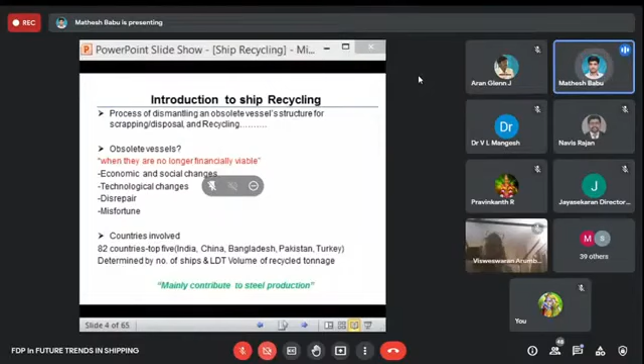So the other reason is disrepair. After certain service of the vessel, if you see the condition of the hull due to corrosion and other factors, due to age, it results in much cost for maintenance. So instead of maintaining the vessel, the owner decides to scrap it due to the age factor, keeping in mind the cost of maintenance is going to be high.

So the other factor is misfortune, maybe due to accidental damages as a result of collision, running aground, or being dismasted in storms, which has led many vessels to be scrapped through salvage rather than undergoing repairs, which would cost very much.

So therefore, when a ship reaches its stage, it becomes necessary to discontinue its operation, and therefore we dismantle the vessel and recycle the material which was used during construction.

So here I would like to highlight that I will be using the word ship recycling throughout this presentation rather than breaking, dismantling or scrapping, because as our Bhupati sir has highlighted, by recycling the construction material and components, the demand for natural resources for producing the same materials is drastically reduced, with consequent reduction in pollution. This directly results in reducing CO2 emissions, which in turn contributes towards the Paris Convention, where we can meet the challenges in the area of climate change.

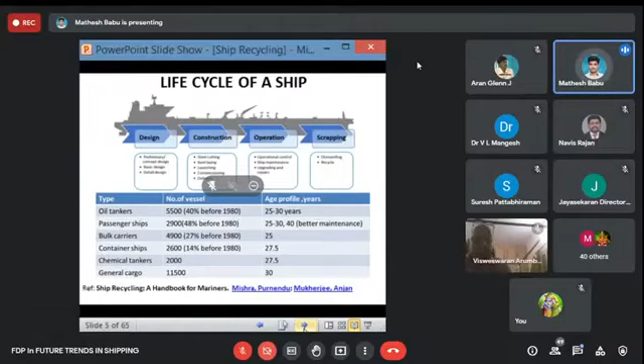So who are the stakeholders in the area of ship recycling? One is we start from ship owner, and then demolition broker, cash buyer, local agents, and scrapyard operators.

A ship owner is one who decides to end the economic life of a vessel when the maintenance cost of the vessel starts to exceed possible revenue, or when the vessel seems not suitable for the second-hand market, it's likely to be sold on for scrapping.

So this ship owner will decide, and then he will be contacting any demolition broker, and the demolition broker will look for cash buyers, maybe directly from a ship recycling yard itself, or some brokers available in the market, and he will be taking it to any ship recycling yard operator's attention, and then it will be sold there for scrapping.

So we all know the reason for the rise, ups and downs of ships sold depends mainly on market conditions, which is decided based on factors like the cost of used steel and the presence of metals available in the market. Not only that, the availability of ships for resale matters - if the freight movement around the globe is very good, then the ships available for dismantling will be less, and the cost will be more. Likewise, certain factors decide the cost of the vessel which will be taken for tender or bid for scrapping.

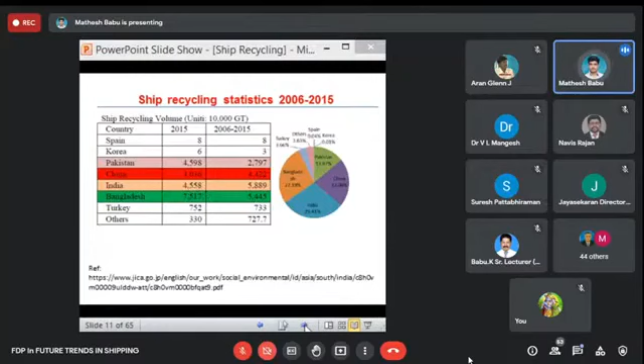So what are the statistics as of now? According to data released by the NGO Shipbreaking Platform, 630 ocean-going commercial ships and offshore units were sold in 2020, out of which 446 large tankers, bulkers, floating platforms, cargo and passenger ships were broken on the 3 beaches in South Asia, amounting to around 90% of GT dismantled globally.

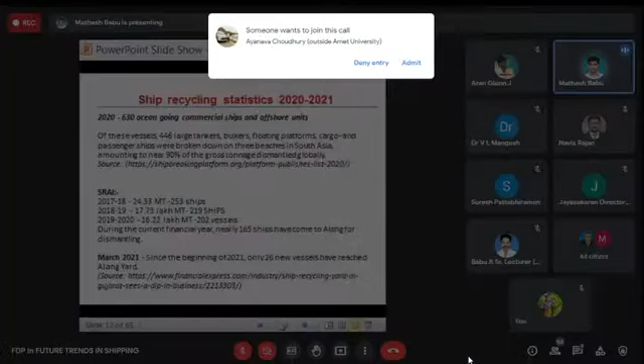As per the official data of GMB, during 2017-18, 253 ships were dismantled, and in 2018-19, around 219 ships, accounting for around 17.73 lakh metric tons. In 2019-20, 202 vessels were dismantled. Of course there is an impact due to the current COVID-19 situation - since the beginning of 2021, only 26 vessels have reached Alang Yard. But vessels purchased by various owners are available here and there, said to have reached this Alang ship recycling facility.

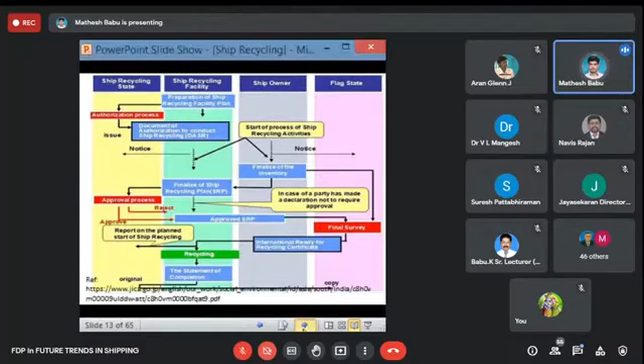So we have seen the role of the ship recycling state, ship recycling facility owners, and ship owners' responsibility in order to ensure environmentally friendly ship recycling, as covered in the previous slides. Now we'll see the ship dismantling process.

This process takes place in the Alang-Sosiya ship recycling yard, where most of the plots - around 150 - are actively involved in carrying out this ship dismantling process. The various facilities required include temporary storage of oil sludge, PCB-containing waste, storage tanks for bilge and ballast waters, space for welding and cutting operations, temporary storage of scrap, asbestos handling facility, radioactive material handling chambers, protective wear keeping rooms, areas for loading and unloading using trucks to be transported through roadways, walk-through areas, and areas for administration.

It's recommended as part of safety measures to maintain open spaces between 10 to 15 plots to provide space for safety and security by means of emergency access, parking, waterline installations for emergency services, access to the beach, etc. This results in around 60,000 to 70,000 direct jobs, and directly and indirectly results in around 3 lakh jobs globally.

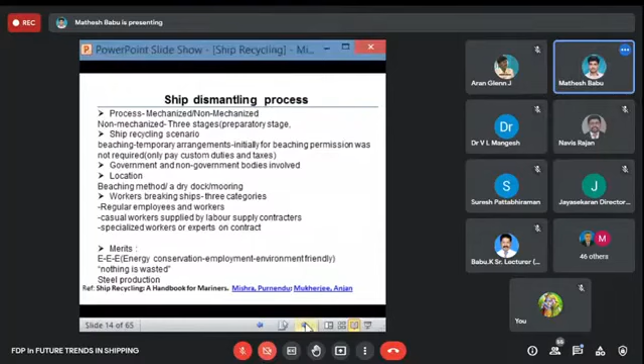Let us see the sequence of ship dismantling. First, we carry out a vessel survey to plan the work based on potential locations of hazardous materials. Second, we remove fuels, oils, other liquids and combustible materials, based on which hot work permits are checked for dismantling the ship to ensure worker safety. Then we remove equipment such as anchors, chains, and small equipment initially.

Then large reusable components such as engine parts are removed once accessible. These reusable materials and equipment are sold directly through the second-hand market available outside the Alang market. Once the propeller and other major equipment are removed, the remaining portion is pulled into shallow water.

Followed by that, we take the process of removing and disposing asbestos clearly as per the guidelines given by regulation. We have to follow the guidelines and dispose it properly. We'll not get into that since it's a controversial area here.

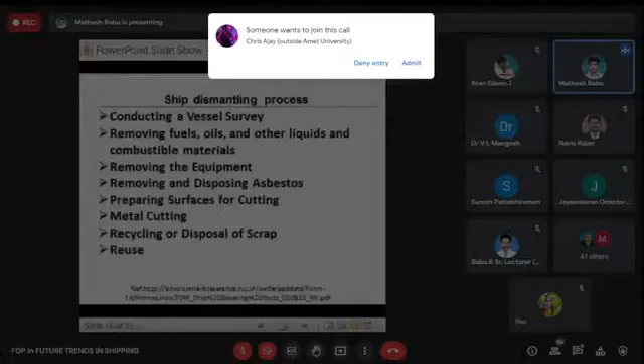Then we go for surface preparation for cutting. First, paint is removed after asbestos and PCBs are removed, followed by removing potentially toxic materials. A specific cutting preparation should be given, such as grit blasting. Then we go for metal cutting.

First the upper decks, superstructures and systems are removed, followed by the main deck and lower decks. Mostly the technique used for metal cutting is oxy-fuel cutting torches. Sometimes shear saws are used, based on whether it is non-ferrous metal only. During my visit to Holland for my postgraduate program, I saw they use an oxy-LPG mixture for cutting operations there.

Then we go for recycling or disposal of scrap through the second-hand market, and then reuse of materials. Many parts can be directly used, like electronics and furniture, electronic equipments. Everything can be directly purchased in the second-hand market and used for domestic purposes there.

One thing to keep in mind as per regulations is that due to security issues, items can be misused by anti-socialists. Likewise, communication equipments like walkie-talkies should be handed over to the government authorities prior to beaching. So that's the process involved in ship dismantling.

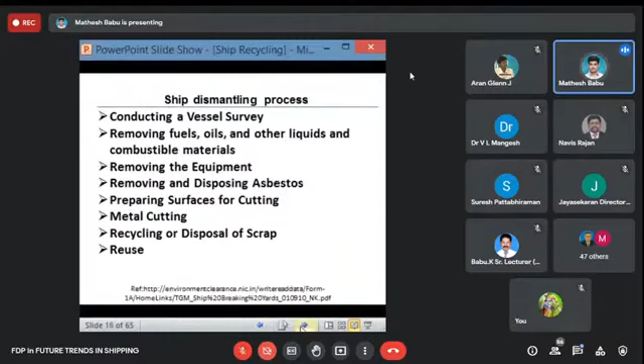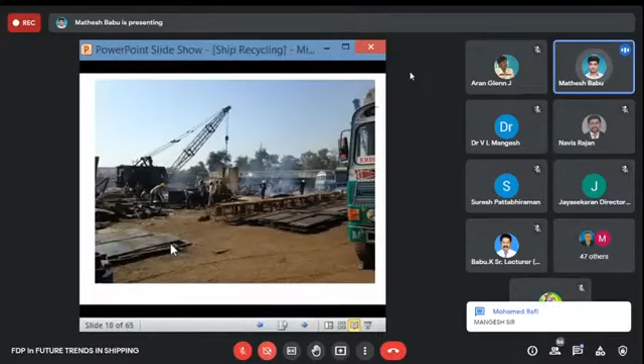I'd like to show a few pics which I took during my project there. This is the entry into Ship Recycling, Alang-Sosiya Ship Recycling Yard, where the dismantling process is taken care of. You can see the plates cut in proper dimensions as required, which will be taken for civil construction purposes.

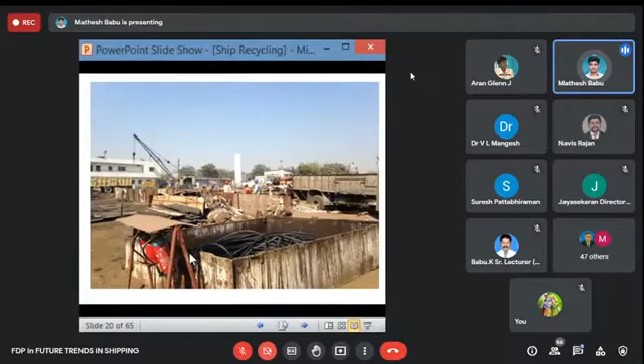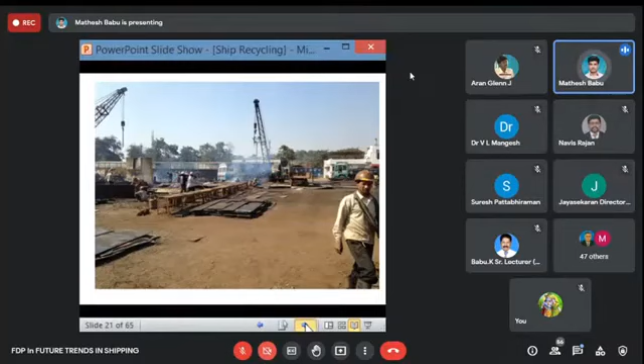One example, you can see a vessel which is beached prior to dismantling, with safety equipments, oxygen plant, and fire extinguisher arrangements. Most of the equipments were old ones, operated by high-speed diesels for example, so the energy consumption is much less compared to other yards in other countries where they use more energy-consuming technologies. You can see one of the oldest equipment still functioning, and cranes loading and offloading to the trucks.

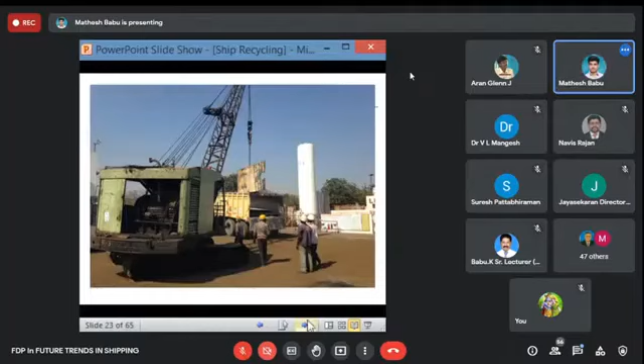These are taken to the reusable sites and second-hand market, where furnitures, electronic equipments, tools, auxiliaries, lamps, auxiliary diesel motors, pumps, winches, cranes, radar and electronic equipments are directly reused. A few life-saving and fire-saving appliances, after renovation and presenting to the class, can be again certified and used on board.

Most of the equipments are sold in the second-hand market, and at the exit from the yard you can see a truck carrying oxy cylinders used there. Now, as we all know, the oxygen available for the industry has been stopped and taken for domestic purposes, to be used in hospitals for this situation.

So, as initially introduced, 90 to 95% of materials are reused, which can be categorized into scrap materials, solid waste, and liquid waste, which will be disposed through treatment plants. Solid waste goes through a centralized disposal facility run by Ship Recycling Association India and GMB, and scrap materials are disposed for reuse through the scrap market.

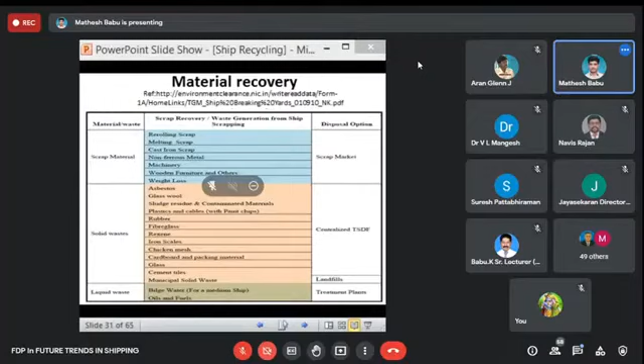Around 70% of materials from the vessel is re-rollable plate. You can see an idea for a general cargo vessel: the weight loss due to its service condition may be around 9 to 15 percent, 56 to 70 percent will be re-rollable plate, 10% melting scrap, 2 to 5% cast iron, 1% non-ferrous metals, 4 to 8% machinery, and 5% furnitures like wood and other furniture equipments.

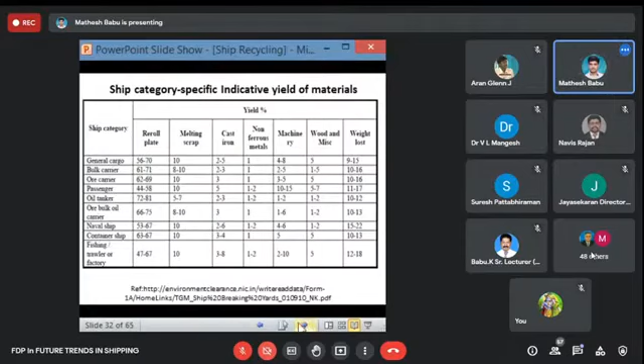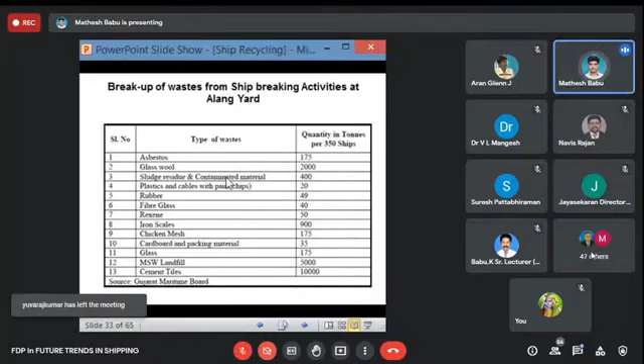Waste which is to be disposed as per guidelines includes asbestos, glass, sludge, plastics and cables, rubber, fiberglass, Rexene, iron scales, etc., which will be taken care of under regulations by GMB to dispose properly.

The Technical Environmental Impact Assessment Guidance Manual for shipbreaking yards has been prepared by the Ministry of Environment and Forest, and is available as an online resource, giving certain guidelines for shipbreaking yards to be followed. One main task is identifying hazardous material, which the convention has now addressed, requiring an inventory of hazardous material list available on board. During the duration of recycling, this will be handed over to the ship recycling yard operator.

It is made easy now, but that technical guidance can still be followed. You can see Annexure 1, which gives the elements of the ship breaking process; Annexure 2, list of hazardous materials and substances applicable to ship breaking; Annexure 3, main items of ships and substances of concern with disposal options; and Annexure 4, preventive measures for environmental elements of concern.

Like we have the responsibility of learning the conventions, just MARPOL, SOLAS, different annexures, we'll have to have an idea on various annexes from technical guidance for shipbreaking yards also. So just for information purpose, it has around 16 annexes, categorized into different zones where much care should be taken at that area.

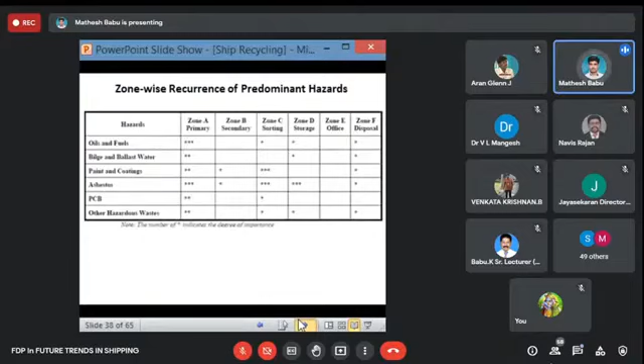Just an additional information, so we'll come to the proposal for enactment of registration for recycling of ships. Based on EU ship recycling regulations, shortly called EU SRR, and then the Hong Kong Convention, IMO, which has led to development of guidelines by IMO. Likewise, we'll have to have an idea on that, and based on which we have to take care of this EU SRR, because some 4-5 years back, European Union countries refused to send their vessels for recycling in our area, complaining that we are not taking care of the environment likewise.

So for that purpose, the EU ship recycling regulations came into picture, which was set up to ensure that proper vessel dismantling methods are used to ensure safe disposal or recycling of all the components, including hazardous material. It entered into force in December 2013 and concerned all EU flagged ships as well as ships from third countries calling at a European port or anchorage of 500 GT or above.

So the rules relating to hazardous material on ships have been framed. First, the EU SRR prohibits or restricts the installation and use of hazardous materials such as asbestos or ozone depleting substances on board ships. Second, it makes it mandatory for ships to have on board a certified inventory of hazardous material specifying the location and approximate quantities of those materials.

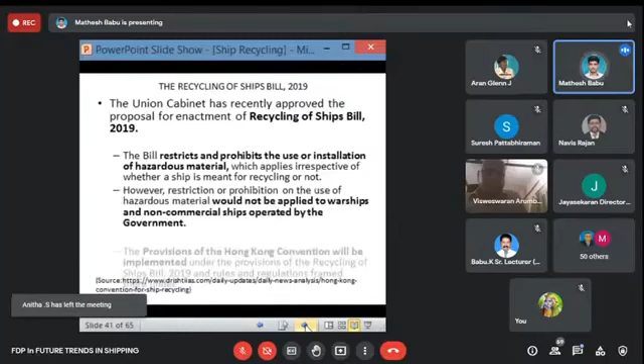So in order to keep the market successful, we are now leading to tackle the hurdles. Our government has passed the Recycling of Ships Bill 2019, which approved the proposal for enactment of the Recycling of Ships Bill, following the EU SRR convention and ratifying the Hong Kong Convention there. So the bill restricts and prohibits the use or installation of hazardous material, which applies irrespective of whether the ship is meant for recycling or not.

However, this restriction or prohibition on the use of hazardous material would not be applicable to warships and non-commercial ships operated by the government. The provisions of the Hong Kong Convention will be implemented under the provisions of the Recycling of Ships Bill 2019 and rules and regulations framed thereunder.

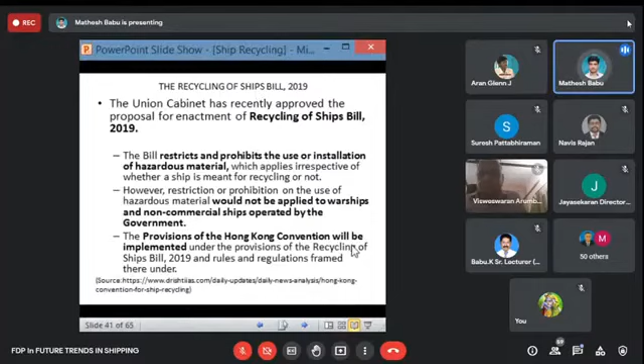And beaching of ships for dismantling at Alang Shipbreaking Yard is increasing post-lockdown, and fiscal 2020-21 is expected to be the best for business at Alang, which will witness 40% of global ship recycling for the year.

We know Alang is blessed with natural opportunities with tides of 10 to 12 meters, so we should make use of it properly. This 40% now government is aiming to take it to around 50%. As studies have shown, the main contribution is by means of manpower.

This is achieved through migrant workers from UP, Bihar, Jharkhand and Odisha, which accounts for around 80% of workers directly employed in shipbreaking at Alang. Studies show most workers settle there permanently and live there, earning around 25 to 30 thousand. Only a few have left to their native places due to the current situation.

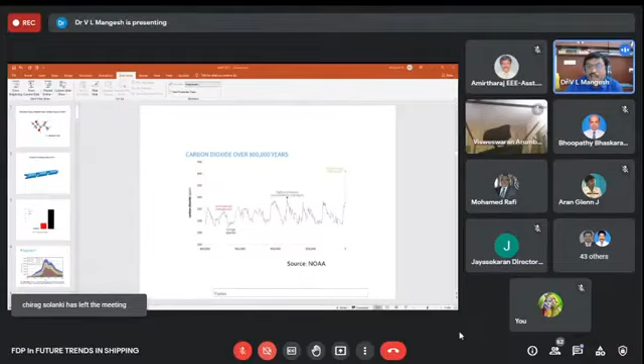So at the nano level, let us see what is affecting. Let's take this coronavirus. If I put a line here and take this line's thickness as 1 mm, and I put 1 million of these viruses into this line, this 1 mm will still be filled up with 1 million viruses. That is the size we are dealing with, and this little fellow is the size of 50 nanometers. So that's the size of our virus, which locked down the entire world for the last 1.5 to 2 years. This little fellow, just 50 nanometers in size, can do such colossal damage. The damage cannot be measured at all, what is happening at the nano level.

Now we will be extending to sub-nano levels. The study today will be at the sub-nano levels where...

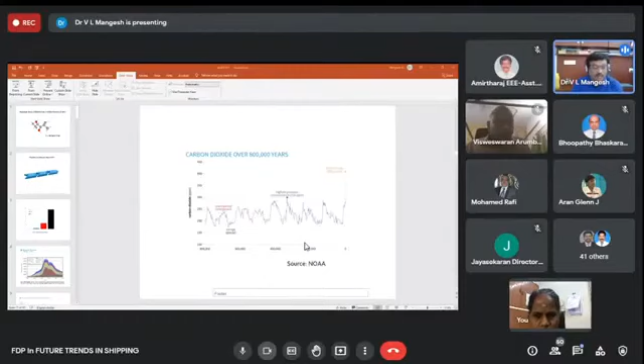Excuse me sir, Mangesh sir, please put it in presentation mode, it's not readable similarly. You have to put it in the slideshow. Okay ma'am, I can put it in the slideshow. Can I go with this now, ma'am? Yes sir, it's okay now, right sir?

So I was telling about these nano level particles, this coronavirus. I'll start again. When I draw a line, the thickness is just 1 mm, and in that thickness you can fill up 1 million viruses. That means a 50 nanometer size virus, 1 million of them can fit into this thickness of 1 mm. So in 1 mm, so much virus is there. This tiny little fellow locked us up for nearly 2 years and brought so much damage.

Today's study will be at the sub-nano level. I will be taking now - can everyone see this scribbling, ma'am?

Yes, sir. Yes, sir. Yes, sir.

So these sub-nano levels, what we are talking is 1 nanometer can have about 7 to 10 atoms. So imagine a 50 nanometer size virus can have about 350 atoms inside. That is the size we are talking about today. We will be going to sub nano levels.

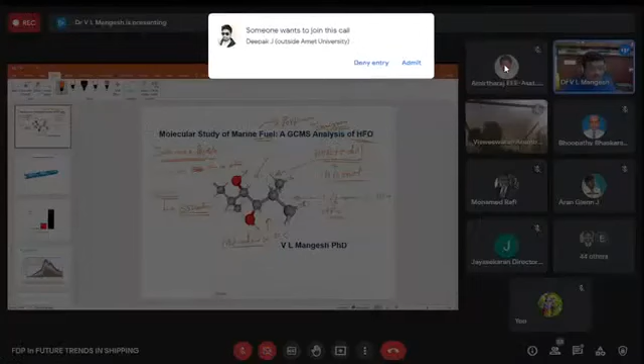It drives the entire ship. So what is most important is that we have to study at the molecular level, how this marine fuel can affect your performance and your emissions, right? Today that is the most hot topic going on. Your performance as well as emissions both depend on these molecules. So let's go and study about this - what are these molecules, what are the different structures there, and what we can do with it.

Now, the other one is normally marine engineering. Marine engineering deals with dismantling and assembling, correct? But today you will be dismantling and assembling molecules. I'll be demonstrating how we have done that so that we can modify this HFO fuel. Now, how to modify it and what are the components there? We will be stripping the atoms and assembling these atoms back in. That must be interesting, right? Instead of doing all your centrifugal pumps, pistons and connecting rods, today we'll be dismantling and assembling your molecular level fuel.

So now, what is the motivation to study a marine fuel at the molecular level? There should be some motivation to study that. Okay, well let's see the next slide. Here you have your NOx, SOx and CO2. The main motivation is because my IMO is pushing me to go for a reduction in emissions. So let me see at the molecular level what we can do for this, so that we can take care of some of the requirements of IMO.

So now we see that for NOx, it is already taken care by primary methods and secondary methods. Secondary methods, you have your SCR, which is taking care of your NOx to reach your tier 3 levels. When you go for your SOx, you have with scrubber and without scrubber. So these two things have been fairly well taken care of. A lot of studies have already been done by previous people. I'm not going to go into this that much, maybe a little bit I'll touch up and go.

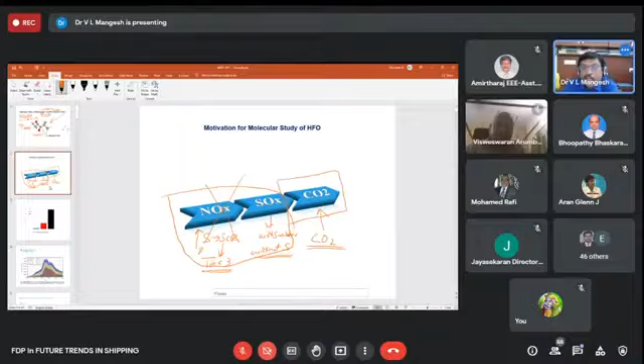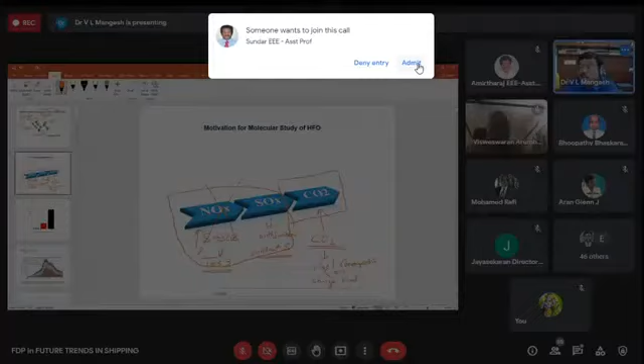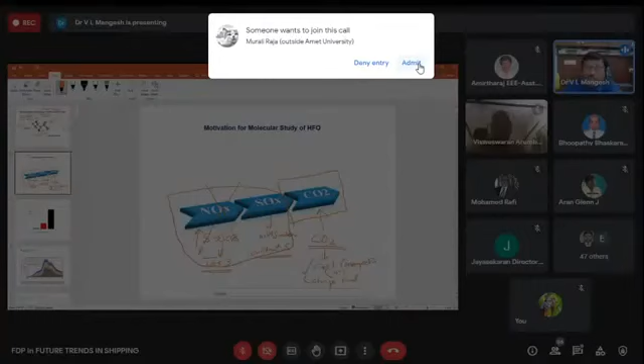My main area will be CO2. Now there is no technology here to reduce this fellow - CO2 has no technology to reduce. The only way we can reduce CO2 is to reduce our fuel consumption, or change the fuel. Now, how to change that? We'll study that step by step. This is the only option you have for CO2, or totally leave fossil fuel and go for some other method of driving the ships. So that is the only option we have here.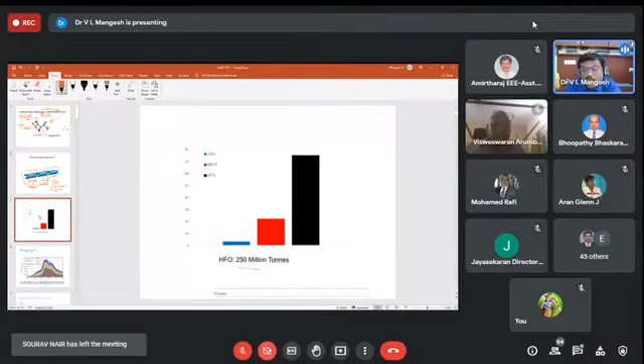Let's go to the consumption. As you know, about 250 million tons of HFO is being used every year by ships. So that is the most highly consumed fuel in shipping compared to your gas oil or your LNG. LNG has just reached about 5%, and LNG is still a long way to go to catch up with HFO.

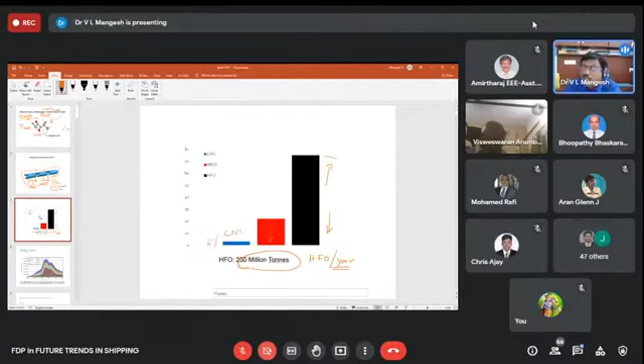The global SO2 emissions - I'll just touch up here. Some interesting points are there in SOx which many people have not highlighted. In shipping, this blue color tells you about only the contribution of shipping. So that's very less. But then we have a very proactive IMO - it sits on our back and keeps pushing us to be better. And of course, mariners can respond for that, and we'll try to improve ourselves.

So if you see this SOx, up to 2100 it is not going away. As per the report given here by a researcher, he says that SOx will be there - that means he is expecting HFO to continue for another 50 to 60 years. Okay, but of course we will have a lower sulfur fuel, but our contribution is going to be the same or lesser than that - much lesser than any other method of delivering sulfur to the atmosphere.

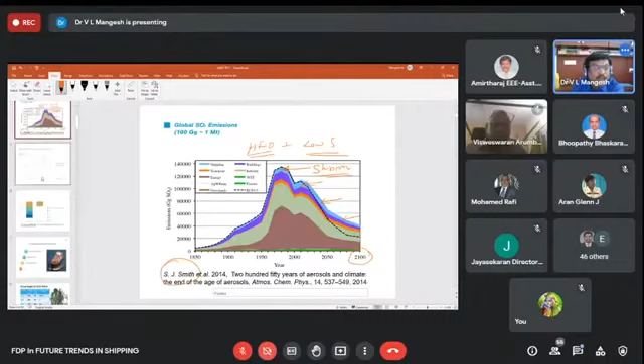Now we will see an interesting paradox here. This yellow line indicates without scrubbers, and this green line indicates with scrubbers. When you use scrubbers, you can use an HFO plus sulfur fuel because you're using scrubbers.

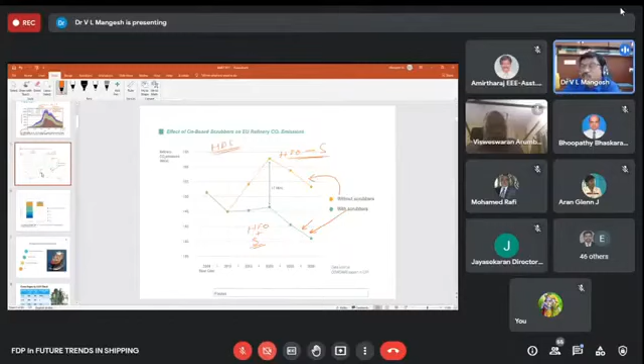Now what happens when you use a fuel of HFO minus sulfur, which doesn't have sulfur? This yellow line indicates that the refinery has to do a lot of work to remove it. We call that HDS, hydro desulfurization, to remove the sulfur from the fuel. They spend a lot of energy to do that, so they need 17 million tonnes per annum of CO2 that they release.

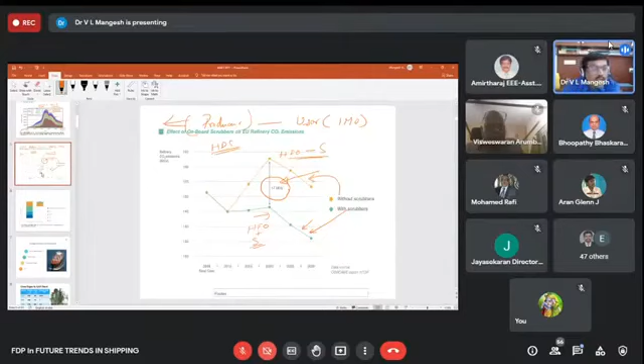IMO says don't release it, but the other fellow is going to release that anyway. There is no coordination between these two people, who are nothing but one is your producer and the other is your user, represented by IMO. The producer has his own associations. So this is an anomaly I like to point out here.

But look at SO2 and NOx. They are showing on the negative side, meaning they are cooling the atmosphere. So the net fact is the ships are releasing CO2, SO2, as well as NOx, and the net effect is that ships have been cooling the atmosphere.

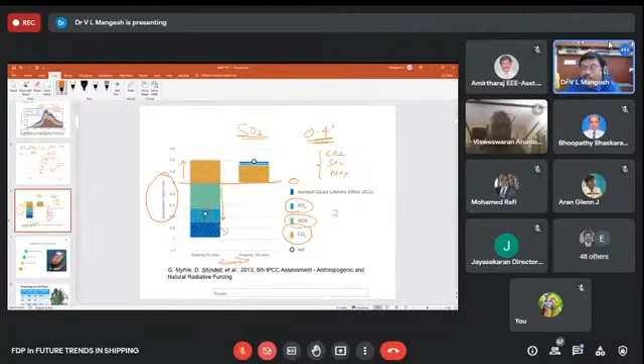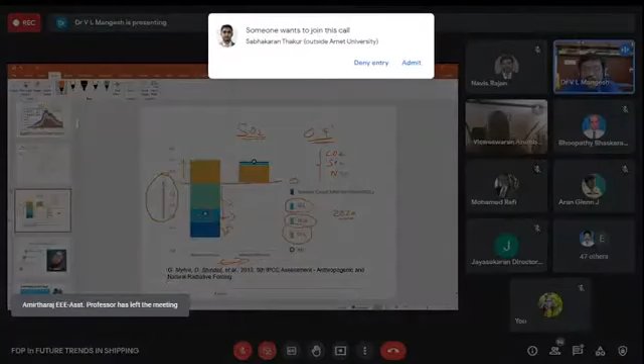Now there's a wrong notion going around that we are contributing to global warming. No, never - we were not contributing to global warming so far. But since 2020, we are going to add to global warming because we are removing these fellows with the Tier 3 regulations. We are going to be a net contributor to global warming because we are going to dump only CO2 into the atmosphere - our cooling agent SO2 is not there.

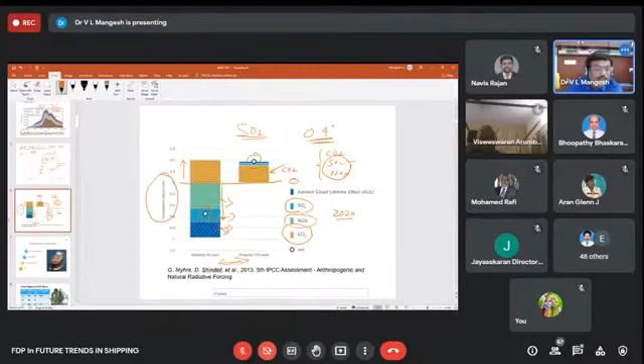Fine, sulfur has its own negatives otherwise, but when I am concentrating only on global warming, then SO2 was a positive factor. We have studied all that. Now let's go back to our CO2. This is where the headache is - CO2. For shipping, the headache is CO2.

How can we strategize to reduce fuel consumption? I told you only fuel consumption can really bring about a change in the carbon dioxide. That means I have to improve the energy efficiency, so my engine efficiency has to go up.

So they have brought up EEDI and EEXI and all these are coming up. They are going to add a burden on the designer as well as the operator - of course, we are the operators there. So definitely our load is going to go up.

The other option is to use alternate fuels. Let's see how much alternate fuels have been employed and what developments have occurred. But I would still say they are all slightly above the experimental stages. This is the line of experimental stages - they are somewhere here. Definitely there is a chance for these to pick up and go further.

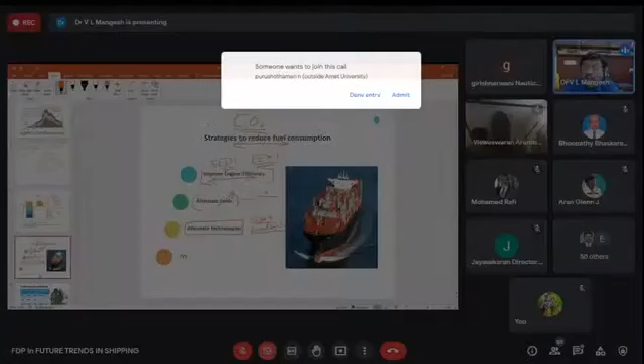Alternate technologies, like solar, wind sails and so on, are coming up, but they are still at the drawing board stage or small experimental level, and need to be adapted to a marine environment. The ship sails in different loading conditions and weather patterns, so these alternate technologies have to prove themselves compared to HFO. I always have a small bias toward HFO because as a sailor I have a love for it. Compared to HFO, the alternate technologies are going to take their time to establish themselves in the market.

Now I have made another option here, where we have done some experiments. I joined with IIT Madras and we did some experiments there to modify HFO - molecular dismantling and assembling of HFO. I'll discuss that a little later.

So the first point - improving the energy efficiency - let's see what has been done. We take one case study of MAN diesel. MAN is a pioneer in marine diesel. Initially it was MAN B&W, now it is purely MAN diesel. These guys keep on increasing the stroke length - the engine stroke length keeps going up. They have brought up something called a green engine, the G70, G80 and so on - they have the G series.

The S series has been serving the marine industry for many decades. Now they have come with the G70.

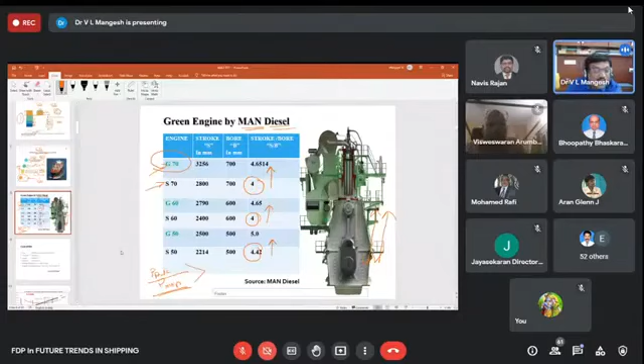If you see the stroke-to-bore ratio, from 4 it has gone up to 4.6514. The G60 model has gone up, and the G50 also has gone up. The higher the stroke, the better your combustion, because your P peak to the ratio of your P mean effective pressure will be higher. When it's higher, your combustion efficiency is much better. There are other benefits of a long stroke too, which we'll cover during question hour if the cadets are interested.

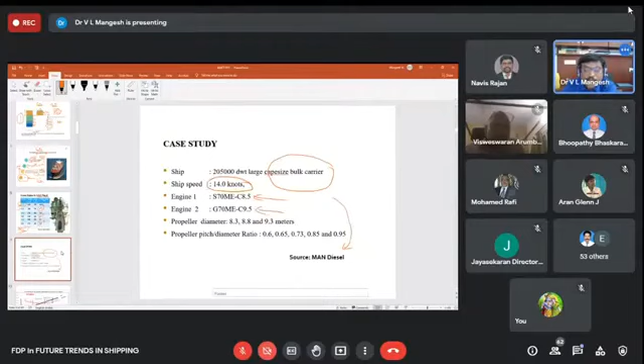Let's take a case study. We've selected a Cape-size bulk carrier study done by MAN Diesel, not by myself. They selected a ship speed of 14 knots and two engines, the G70 and S70, with different propeller diameters and pitch. The scenario is that an owner approaches MAN Diesel wanting 14 knots for his bulk carrier of 205,000 deadweight tonnage. Then what engine can we select? MAN is going to offer him two engines.

Now let us see how MAN will justify this when it comes to saving fuel.

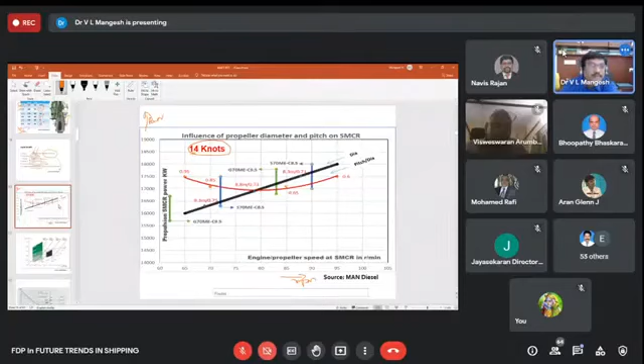Then you have two engines, this blue one and the green one. Let me select only the blue one. When I select this and connect it to this point, and bring it out here, you can see this represents the engine layout. This is your upper speed limit and lower speed limit, and the mean effective pressure at the upper end and at the lower end.

This rectangle represents where the engine manufacturer says your MCR can be anywhere within this point. Your propeller curve is going up, your MCR can be anywhere, and of course the MCR will be at this point here. Then we have the NCR, the normal continuous rating. At this point your MCR is here.

Now the designers have said that for an 8.3 diameter propeller, my NCR is here for the blue one. For this application, MAN says they can deliver 14 knots for the ship. That's what the owner wants, and that's what MAN is delivering. Let's see at what power it's delivering - it's delivering 17,500 kilowatts, offered by MAN at a speed of about 87 to 88 RPM. That's the first option, because the blue indicates the S70, the S70 engine, the S class, SMC class.

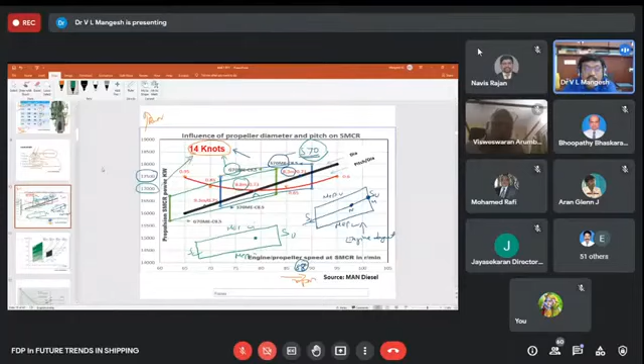Now look at this - this is the G70 engine and this is the S70 engine. Both are able to give 14 knots. But the point here is G70 gives you 17,000 kilowatts. With 17,000 kilowatts, they're able to give you 14 knots, whereas your SMC class gives you some 500 to 600 kilowatts higher to deliver the same 14 knots. So you can see the efficiency has gone up by 600 kilowatts, meaning you've saved that much power - over 17,500 that comes to about 3%. That's not a small deal, it's very tough to achieve. This 3% is not fuel savings, it's power savings.

And imagine, MAN must have suffered so much to get this 3% saving in your power. Okay, that's the level of research and commitment going on at MAN engines.

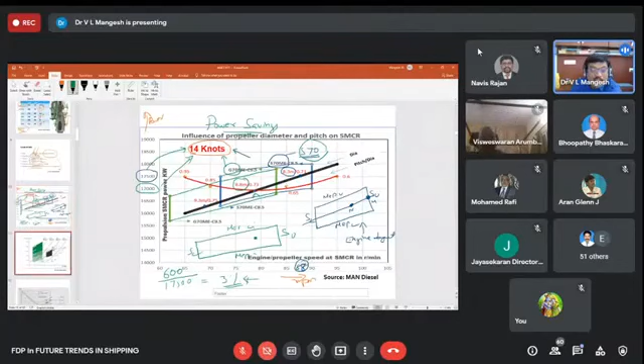Now let's see another option here. They have a suite of ships, I mean engines. There are so many types of G engines which are offered. All are operating at a very low speed, almost reaching the stalling speed. Look at that, like 58 RPM to 68 RPM. It is at a very low end, right? Compared to your SMC class, which is operating at about 72 to 80 RPMs. Much lower. I mean, I don't know, in future they'll go to 40 or 50 also. We don't know.

But this engines, at every knot level, when you select the engines, they'll deliver about 3% savings in power. You have to note it down - again, I mentioned it is power savings.

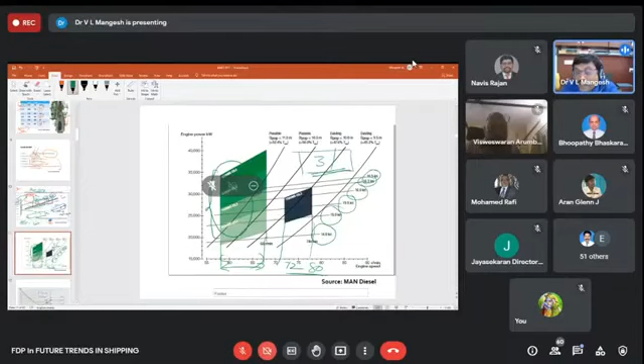The next slide - this is your SFOC. You must be knowing, all marine cadets, what is SFOC - specific fuel oil consumption, which is given in grams per kilowatt hour. If you see that, the fuel savings is about approximately 2%. So MAN has worked so hard to get a 3% saving in power plus a 2% saving in fuel.

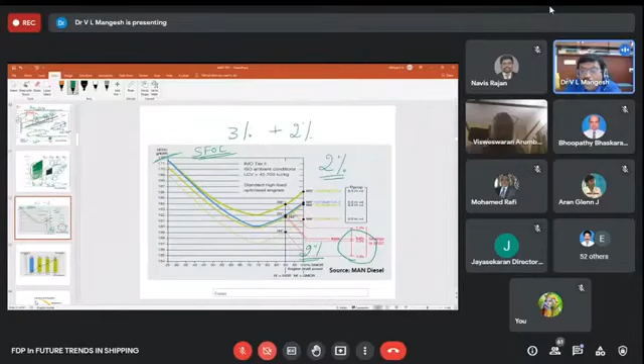These are different engines which are operating at the SMCR level. You can see that at the SMCR level, you get a 2% saving. To get that 2% saving, MAN works so hard.

Now let's see the other one - this is the net saving, fuel consumption saving. That means my power is around 3 and my fuel is around 2. And they are able to optimize and get up to 7.8% savings for a 6G70, a 6-cylinder G70, as compared to a 6-cylinder S70 engine. So much of hard work has gone into achieving this, because 3 into 2 is about 6.

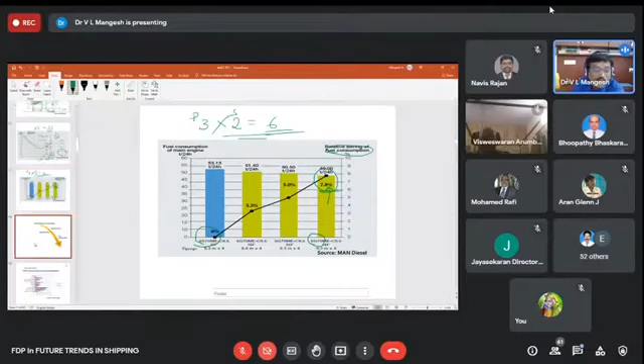And due to optimization and further refinement, they are able to reach up to 7.8% fuel savings. This is the power saving, this is your SFOC savings, and this is your fuel savings. So that much hard work goes into achieving 6 to 8% fuel savings. We have to work very hard. So again, I put it across here - the performance of the G-type engine is nothing but to reduce the power, reduce SFOC, and thereby reduce fuel consumption, and meet IMO EEDI targets.

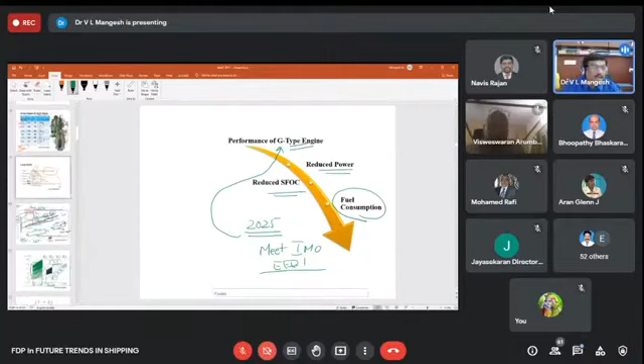So the designer, MAN, has designed a G-type engine to meet the IMO EEDI targets, maybe up to 2025. They are clear up to 2025, and then after that we have to see what more they can squeeze out. So what MAN has decided is they are struggling to get this 2% and 1% and all that. So let's go back to this slide on strategies - let's think how MAN will be thinking for the next step.

Strategy is that they have done this - they have improved the engine efficiency. Next what? Because IMO is going to come back with a higher target, right? Now they have to be ready for that. So they are going for alternate fuels. The next step is they have to achieve a higher reduction in CO2, so they are now targeting lower fuel consumption through alternate fuels.

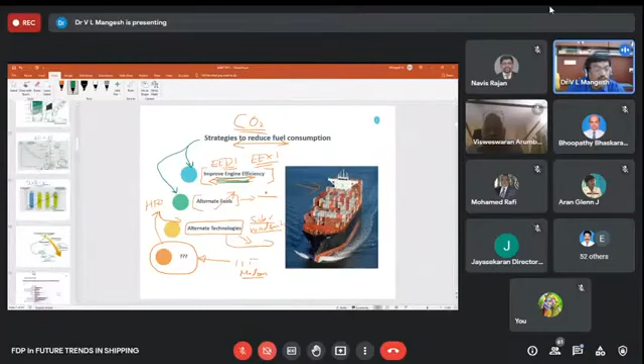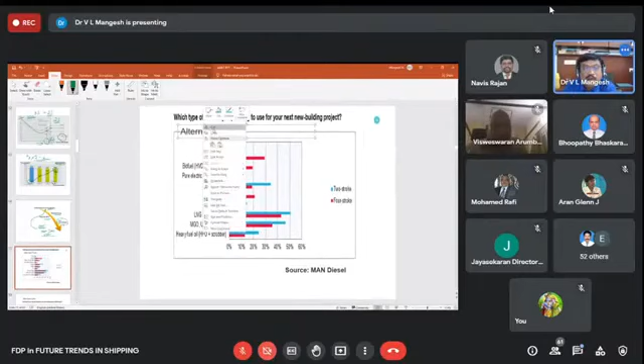So this is a study they have made. I hope you all can see that - if you want, I can zoom it up a little bit more. So these are the alternate fuels. Now there are a lot of fuels there, but what impresses, from a point of view of a fuel person who has done research in fuel, is LNG. This guy is very, very promising. I'll be dealing with LNG from a carbon number point of view in further studies. LNG is very promising.

Of course, methanol is there, but then combustion characteristics are not so favorable, and your gross calorific value or net calorific value of the fuel is much, much lower compared to LNG. Now I'll tell you about LNG - the beauty of LNG is it has the lowest carbon number.

LNG is the lowest carbon number fuel, but very high in net calorific value. I hope cadets know how much it is - it's 50 megajoules per kg. So if you burn 1 kilogram of LNG, you get a net output of 50 megajoules.

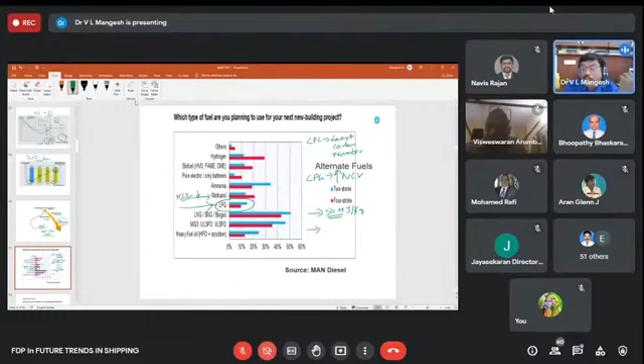Comparatively, your diesel can give you 43, your HFO can give about 39. So imagine if you convert from HFO to LPG, straight away you get a 20% savings - you don't need to do anything. That 20% saving comes just from conversion of HFO to LPG.

Your benefit is straight away there. That is why MAN is focusing on that. These are clever people - because they hold the big market, they have to be one step ahead of IMO. MAN is always ahead of IMO, they don't wait for it. These guys are doing 24/7, 365 research to improve and see what will be the future, what is the next new building project. They only think about the future.

Now after LPG, what is most promising is hydrogen. I have my fingers crossed because its safety and all is a question mark. You can use it for fuel cells, etc.

But even after 15 years, for the next project, there is still demand for HFO - with scrubber and without scrubber. The meaning is that very low sulfur fuel is without scrubber, and with scrubber is different. Still, HFO gets about 35% of shipbuilding projected.

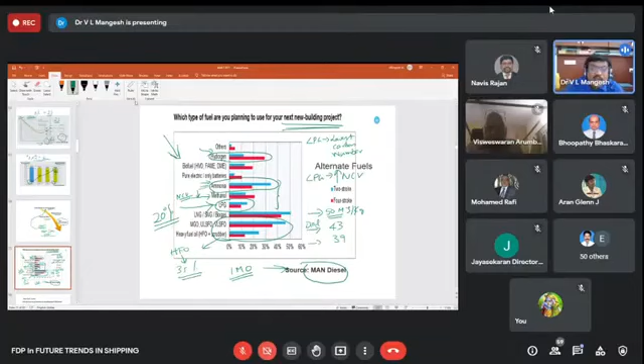That means from today, you can still expect about 40% of ships coming out with HFO. Let's say you have about 50,000 ships running in the market now - let's go to the next slide. So about 50,000 odd ships flying in the ocean at any given time, and your shipbuilding will be around 800 ships per year.

Now what is your EEDI? It is only for new shipbuildings. IMO initially thought they would be able to manage it, but by the time you reach even one third of this HFO fleet - this 50,000 is HFO - it's going to take about 10 to 15 years to even reach one third of the fleet. So they hurriedly came up with EEXI.

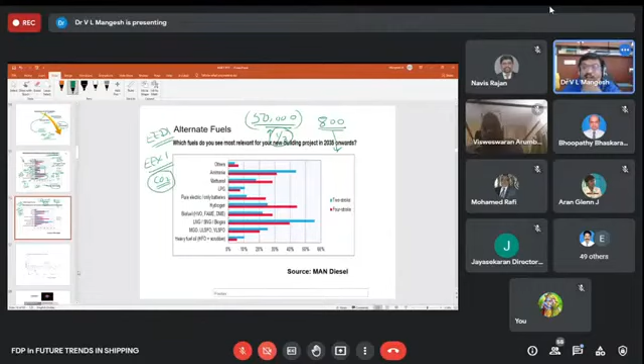Even existing ships should have an energy efficiency method for CO2, because they touched the panic button. They came up with a concept saying no, for CO2 we have to take steps with all the ships. That is a real headache coming very shortly for everyone. I don't know how they are going to do this - there are a lot of retrofittings to go on to convert that. I don't know, the owners must be in trouble now.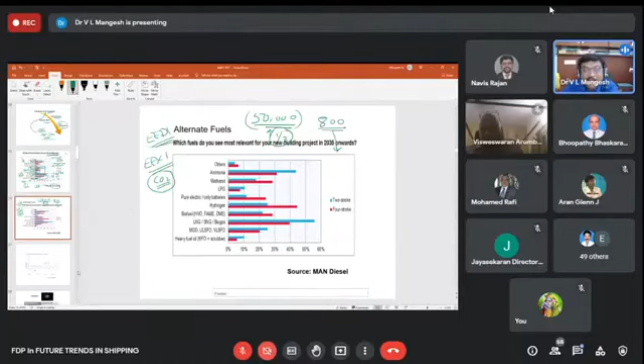Because they initially focused only on new buildings, and given that only 800 ships will be coming per year compared to the 50,000 already running, it will take a long time to convert everything.

So this is a shipbuilding projection from 2035 onwards. I told you all, LNG is the leader now. So if you go 15 years from now, about 50% of the ships coming out are going to be LNG. That is the projection made by MAN Diesel - it is a study, a projection.

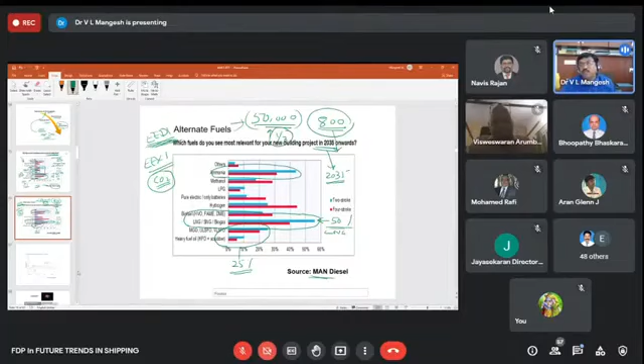But if you take HFO, it is still going to be at around 25% - it is still not gone, it is still there. Your LPG and your ammonia are also picked up, yeah ammonia is also picked up. So all this, MAN is working out to try and reduce CO2. This is what is happening in the drawing boards of MAN diesel.

Next, why do we have to talk about CO2? Now I will show this in the slideshow because it will be looking dull here. Then I will try to zoom up here, and I think you can see this.

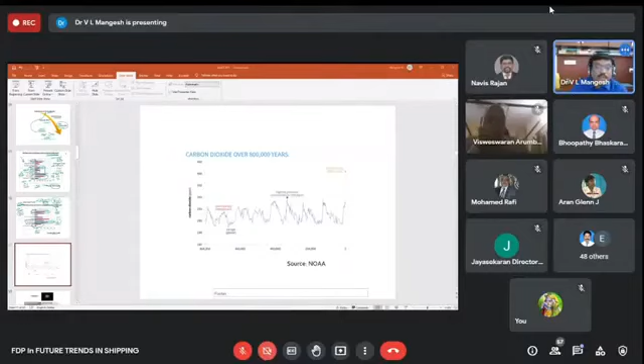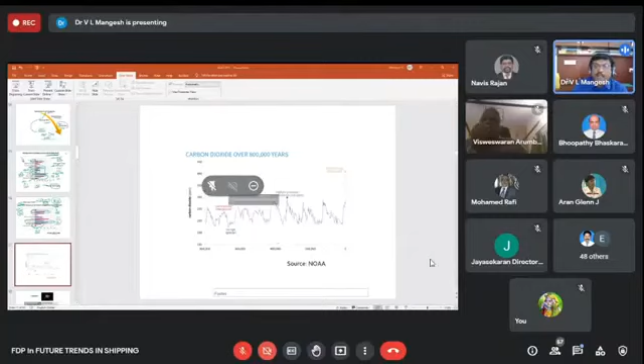This is a study made by NOAA, the US atmospheric agency, just like your US Coast Guard - these guys are for the atmosphere. They have done a study saying that for the last 800,000 years, the concentration of CO2 was fluctuating between 300 ppm to about 180 ppm. When you reach 300 ppm, it is global.